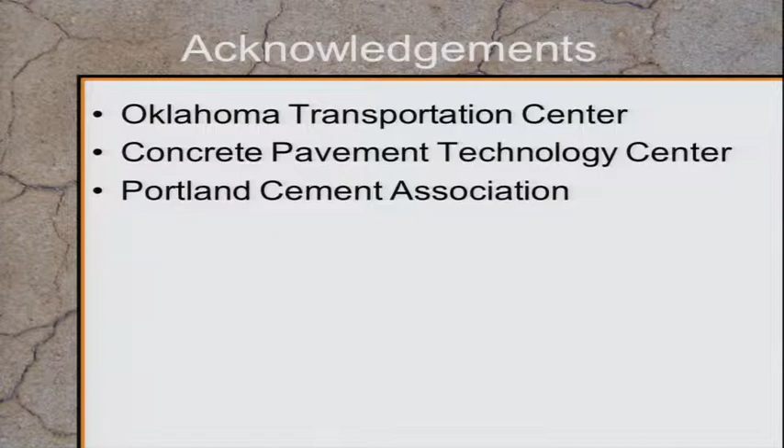And I have a whole team of graduate students listed up here that have all done some very, very great work on this project. Could not have done it without them. In addition to that team, I need to thank the folks that believed in me, that funded my early research project in this, because this is a little bit out of the ordinary. Oklahoma Transportation Center, Concrete Pavement Technology Center, and Portland Cement Association - this work started right here in Oklahoma, and we should be proud of that. Really, really proud of that.

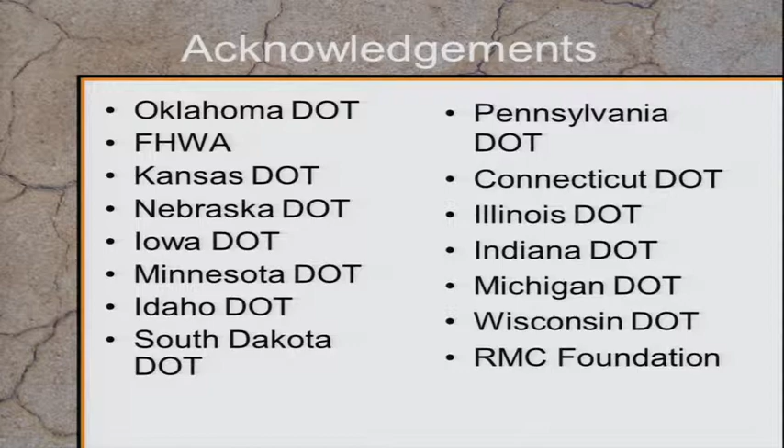Ongoing right now is actually the first Oklahoma-led pooled fund study, again, by research developed right here at Oklahoma State University. And ODOT should be very proud that these states have decided to join them and to fund this research. And I want to especially thank the folks here, and especially Ron Curb. Ron, this work could not have happened without you. I really appreciate it. But all these folks here on the whole research team made this possible. Okay, thanks a bunch for you guys.

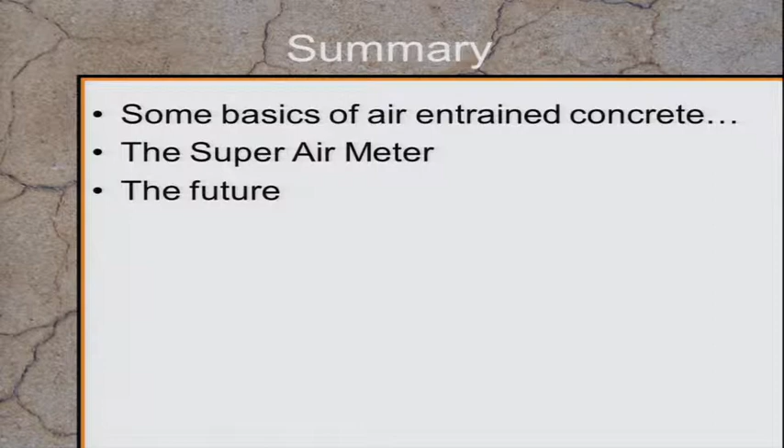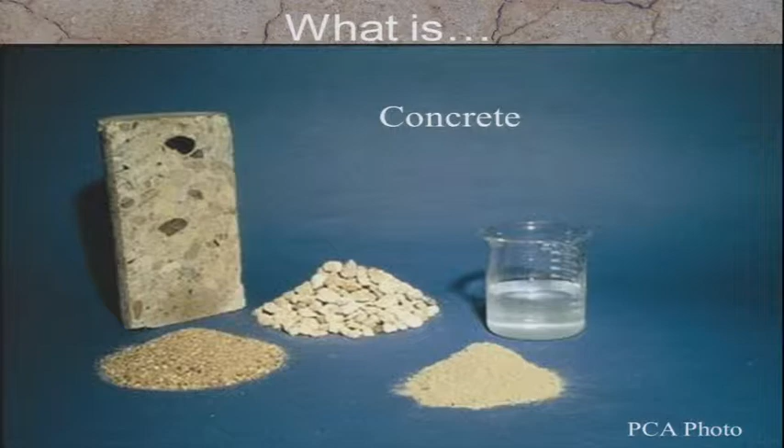Now I'm going to talk about some basics. I'm going to talk about the basics of air-entrained concrete. Something talked about, again, a new meter, something called the super air meter, and then the future, right? Now we're going to be talking about concrete. In my opinion, it's the greatest material on the face of the earth. And Jeff Volz and I will battle anyone in a battle royale that says differently, okay? We love concrete. We know that the ingredients in concrete are rock, sand, cement, and water.

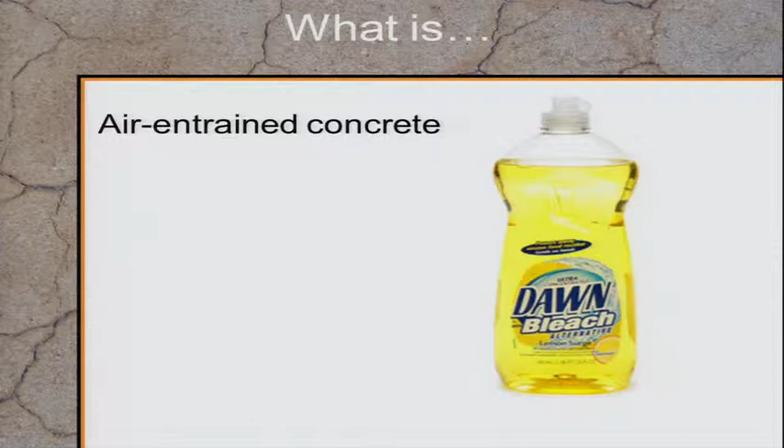And actually the last ingredient is love. You just got to whisper some sweet words to that concrete right as you're making it. That's the secret, okay? If it's not working, just whisper some sweet words to it. But you need one more ingredient if you want air-entrained concrete. One more ingredient: you need soap, okay? And I'm showing Dawn dish soap up here, and you can actually use Dawn dish soap to air-entrain your concrete. And you think, well, why would you do that? Well, your hands smell great, okay? But it doesn't really help your freeze-thaw durability, and that's what I'm going to be talking about today.

Why would we ever add air to concrete, right? Because when you add air, it's not very strong. All of my students know this. They've all heard that from me before. Air is not very strong, so why would you add something that's not very strong to your concrete? Well, these bubbles happen to be the key to the freeze-thaw resistance of the concrete. The key. And as we talked previously, weather's a big thing here in Oklahoma. Freezing and thawing is definitely a big thing, and we need these air-entrained bubbles.

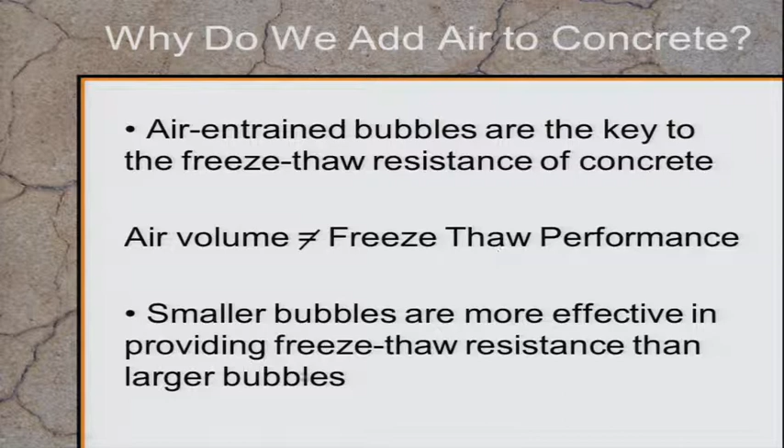This is really important, ladies and gentlemen. This is a new kind of concept. Air volume does not necessarily equal freeze-thaw performance. I'll say that again: air volume does not necessarily equal freeze-thaw performance, and I'll be proving that to you today. And the smaller bubbles in our concrete are much more effective in providing freeze-thaw resistance than our larger bubbles. So how much air do we need?

Most people know, most people that are in the field, most people that have dealt with concrete, they just know you need about 6% air. That's the old tried and true concept developed in the 1950s off 3 mix designs with 1 cement and 1 admixture.

It's not the same world we live in today, ladies and gentlemen. We live in a very, very complex world. We're going to talk about that coming up.

The current ways to measure air inside concrete are usually one of three methods: the pressure meter, the roll-a-meter, or the unit weight, and most commonly it's the pressure meter. We're going to be talking a lot about the pressure meter today, and actually an update to the pressure meter. But the biggest problem with all three of these methods is that they only measure volume, and volume is not enough.

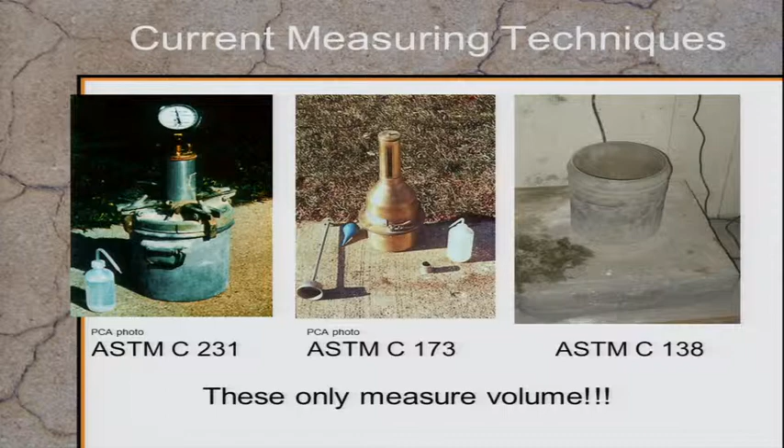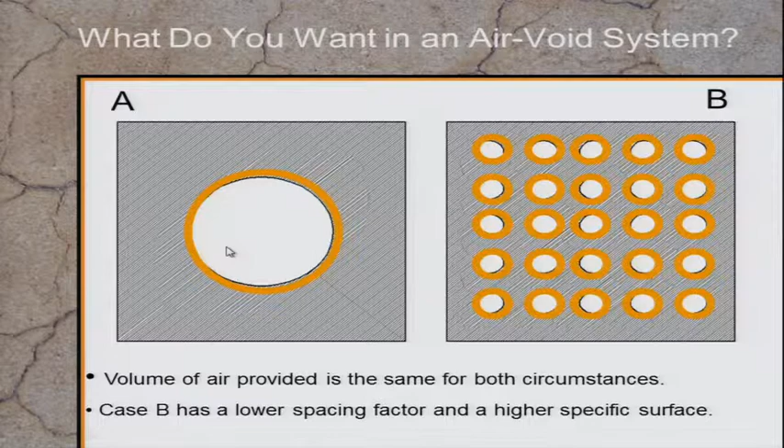That's why we want small, well-distributed bubbles inside of our concrete. Again, both of them have the same volume, but they don't have the same performance. Hope that makes sense.

Now, how would I find out what my spacing of my bubbles are? Well, right now, the only way to do that is to take hardened concrete, cut it up, polish it, and look at it underneath the microscope and actually run a linear traverse through it, and you count the bubbles. Oh my gosh, how boring is that, right? Yes. It kind of sounds exciting, but I'm kind of weird, I know. Takes a long time to do this, right?

But with this technique, you get something out called the spacing factor. Ooh, doesn't that sound impressive? What the spacing factor is, is a roundabout way to talk about the bubble spacing. Just real simply, it takes the real bubble distribution, or some concept of it, and makes an average size bubble averagely spaced in the paste, and then takes the average distance between them. So it's an average of an average of an average, right?

In the end, it tells us something about the bubble distribution inside of our concrete, and it works pretty well. And if we didn't understand anything I just said, that's okay. You should know that the spacing factor you want is 0.008 inches. That's the number you want. That's the magic number.

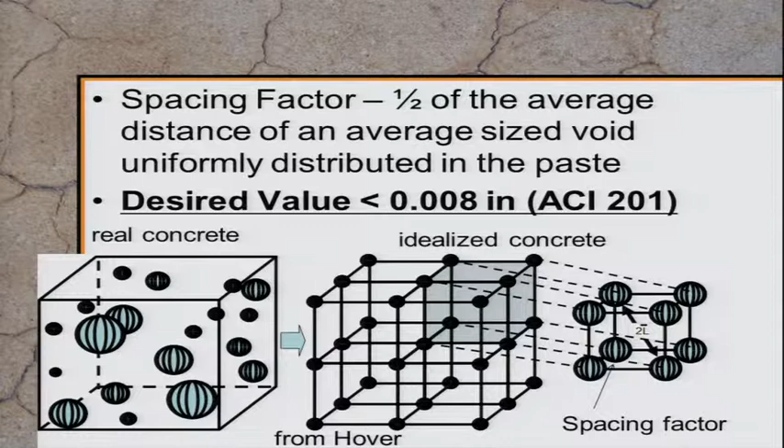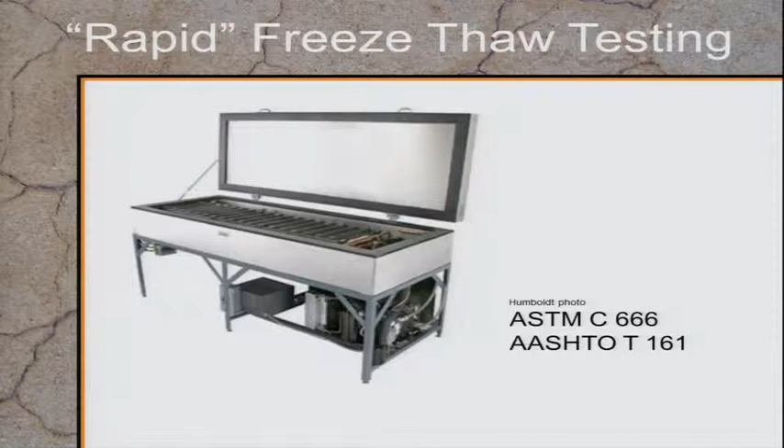Great. And the way to really test this is with something called the rapid freeze thaw testing. Notice I have the term rapid in quotes because it's very rapid in terms of geologic time, but not rapid in terms of human time. It takes about 3.5 months to run this test, and we cannot wait to decide if that's good concrete until 3.5 months after it's been placed. That's just not acceptable. But that's the tried and true method.

Now, if we can summarize all this: we've got these pressure meter tests that don't take very long, they take minutes, and they give you total air volume. We've got this hardened air void analysis test, this microscope test - it takes 7 to 14 days because you have to cut the concrete and polish it, but it tells you something truly about the air void system. We have this rapid freeze thaw test, which takes 3 months. This is maybe the best of all of them, but we can't wait 3 months.

So what does everyone use? The test that takes minutes. We have to make decisions now, right? Got to make decisions now about our concrete. We have to decide immediately - is it good or is it not? What's going on? Now, let me just show you this in another way.

Maybe there might be a few skeptics out there when I say that our modern concrete mixtures are a little bit different than our old ones. And this is a very old school mixture. This concrete mixture only has one admixture in it, an air entraining admixture.

That's it. And we can notice we got this magic spacing factor. That's the magic number, I'm showing you 008. That's the number you want. And when you get enough air inside your concrete, you're good. 6% worked well, that meets specifications. Everyone's happy, everything's good, the world's a good place.

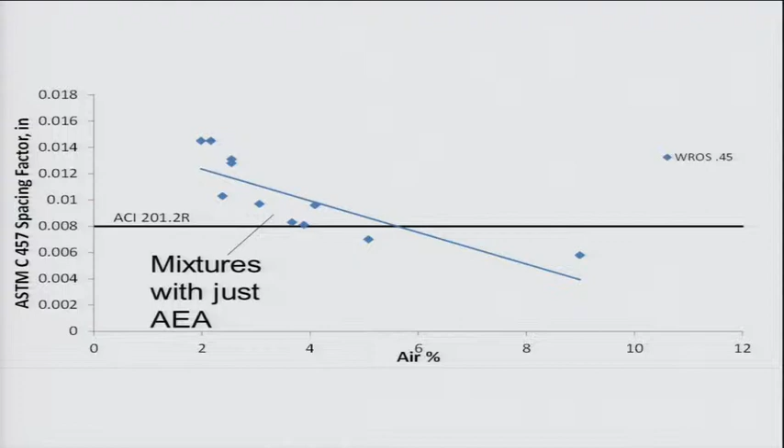Now let's bring in the bad news. If we bring in a mixture with a high-range water reducer in it, how often are those used these days? A lot. Well, when you start to combine admixtures inside your concrete, you'll find out that 6% air doesn't work well anymore. 6% air doesn't provide us the spacing of the bubbles that we need for freeze-thaw performance, and I'll prove that to you coming up.

And you need something like 9% air sometimes. In some mixes it's 7, in some mixes it's 10. Air volume by itself is not enough, and I call this the yikes graph, because for specification writers this is the scary one. You have no idea what concrete mixture they're going to use when they go to build your job. You can just tell them how much volume of air right now, and we need to do better than that, and we will. Let me show you a bit more data.

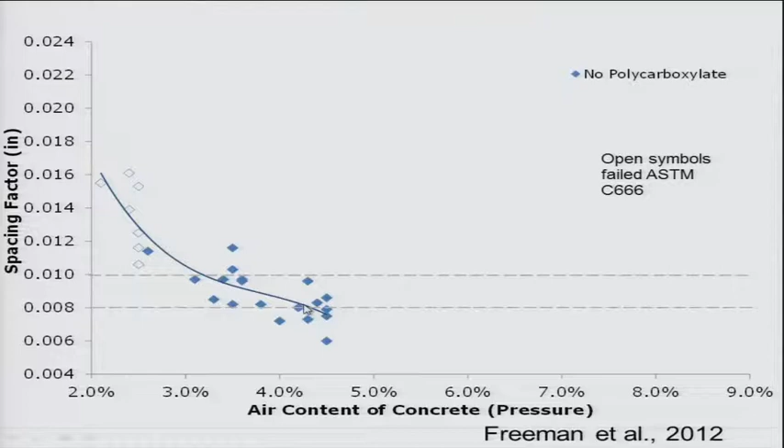If I show air content down here on the x-axis, I show this spacing factor number, and this is this magic number, 008. And now I'm showing you data: if it's an open dot, that means it failed the freeze-thaw test, and if it's a closed dot, that means it passed. This is mixtures with just air entrainers, the old school, the easy ones. And if you start to bring in mixtures with high-range water reducers in them, they start to look like this. These two data points right here should make every highway official, every owner of concrete infrastructure take notice.

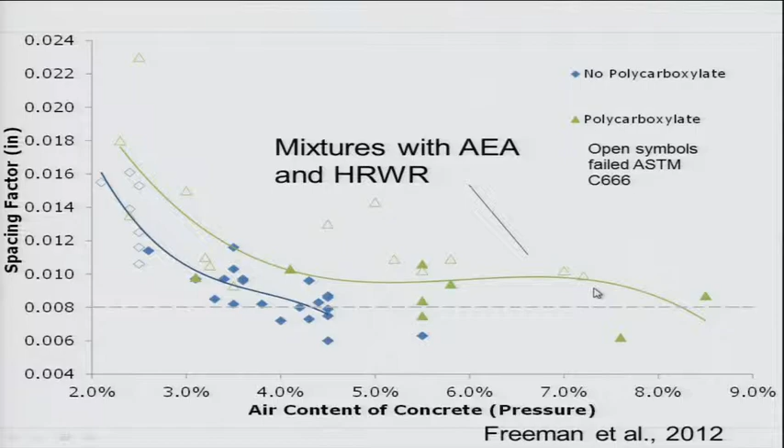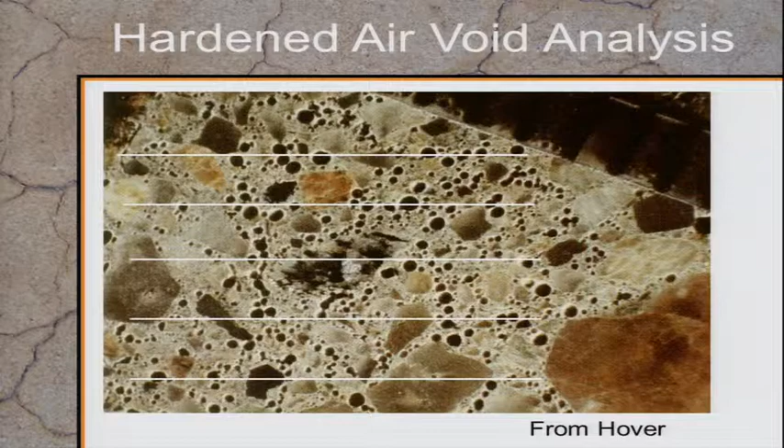Because these mixtures would pass every specification in America, yet they're failing the freeze-thaw test. So why does this happen? What's going on here? Why does this occur? Well, remember that hardened air void analysis? We can actually go through it. Instead of just using one number, we can look at the distribution of the bubbles. This is the bubble size down here, and this is the frequency, or how often they occur.

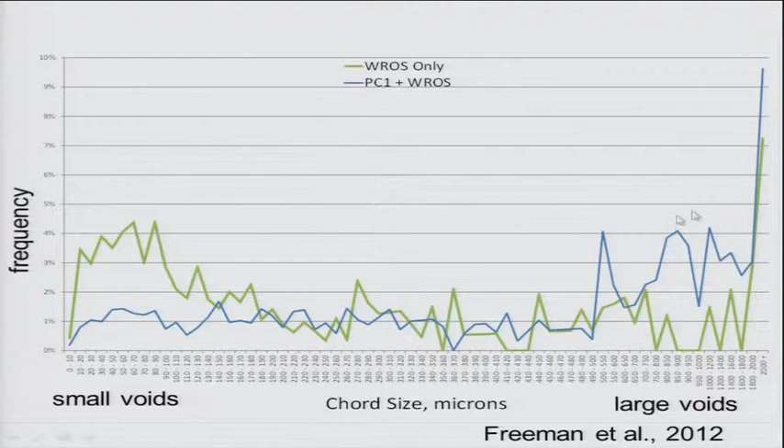They're small voids, and this is the mixture with just an air entrainer, old school. Look at that, we get a bunch of small voids. That's good. And look at the new mixture, the ones with the combination of admixtures. We get a bunch of big voids. That's bad. It's that simple, ladies and gentlemen. Good and bad, okay? That's what we want. Air volume is no longer enough.

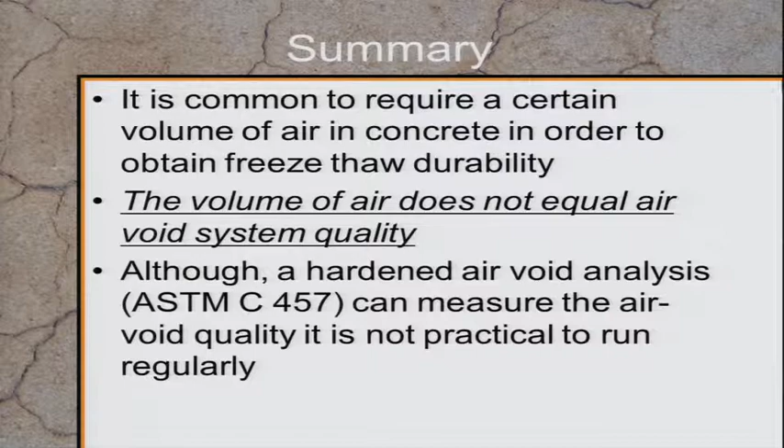So in summary, it's common to require a certain volume of air in concrete in order to obtain freeze-thaw durability. But this volume of air does not equal air void system quality, it does not equal freeze-thaw performance. And although we can run hardened air void analysis, it's just not practical to run that all the time. So what do we need? We need a test that can quantify air void systems quickly in fresh concrete, a test that can investigate a sample of significant size that's economical and field ready.

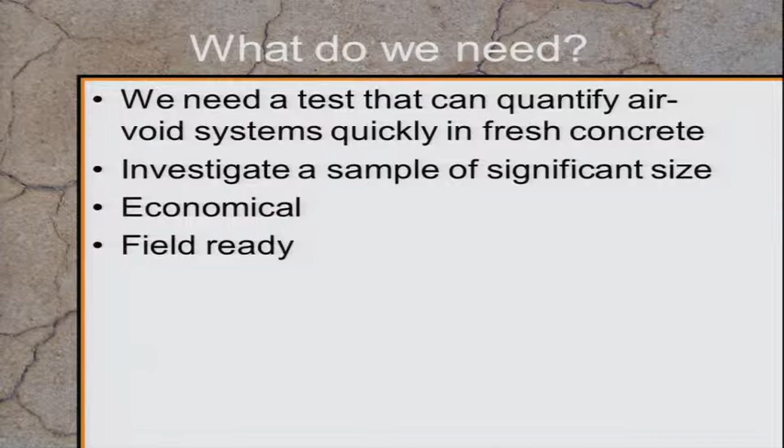Ladies and gentlemen, I want to introduce and talk to you about the super air meter. What it is, is a typical air meter, but we've modified it so it can hold higher pressures. We've actually replaced the typical dial gauge with an actual digital one, and the test is going to end up taking 8 minutes to run, which is a little bit longer than the actual typical one, but that's okay. I'll talk more about that coming up. And this is what it looks like, and I'm actually lucky to have one right here in front of you today, so you can come and look at it if you want later on.

And if we notice, the label is orange - oh, strikingly orange. What a beautiful color. That's on purpose. And no, it doesn't come in Sooner Red.

The digital gauge on top is really cool. This gauge is amazing, something we developed at Oklahoma State, working with other folks. It will tell the operator how to run the test, watches the operator run it, and will void it if they run it incorrectly. It gives you all the calculations and two numbers: the air content, same number we're used to getting, and something called the SAM number, which I'm going to talk about. This digital gauge is really, really important.

Everything here you can learn more about on this website, superairmeter.com. So how does it work?

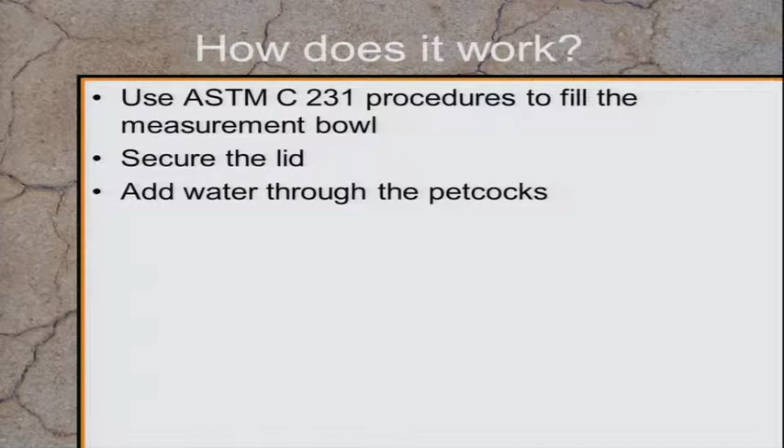Well, you fill the bottom bowl in the same way you always would, no difference. Three layers, 25 rods each, tap it with the hammer, put the lid on it, add the water through the petcocks, same way we always run an air meter test. We're going to talk about what goes on in the top chamber and the bottom chamber. Top chamber's up here, bottom chamber's where your concrete goes, and this is where the actual water is.

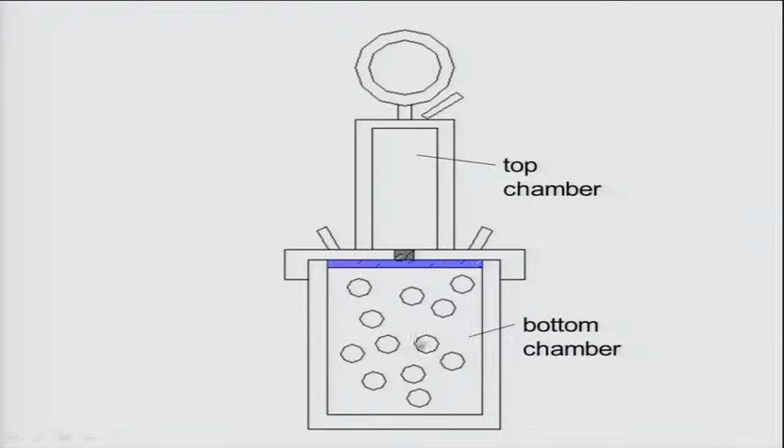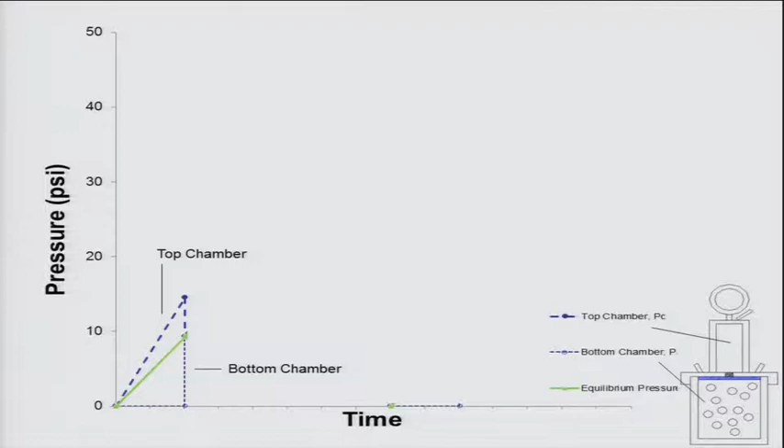This is just an idea of how the test runs. This is pressure, and this is time. Top chamber, you increase the pressure, the bottom chamber's at atmospheric. You hit the lever, smack it with the hammer, and that's the typical way to run a pressure meter test. This is the standard way, okay? For you concrete people out there, you know what I'm talking about. If you don't, good luck to you.

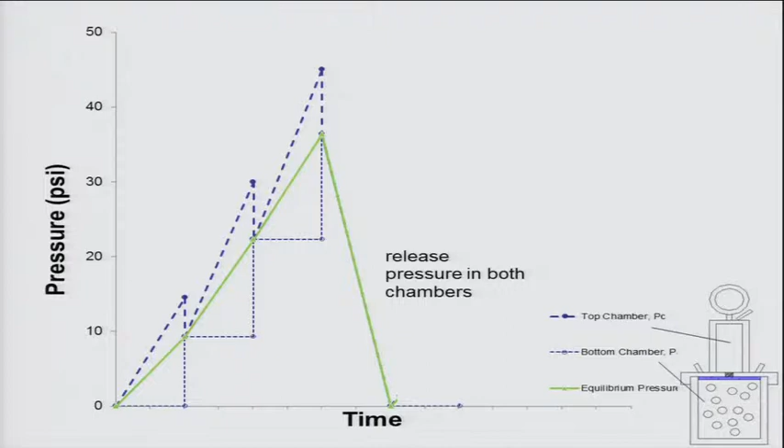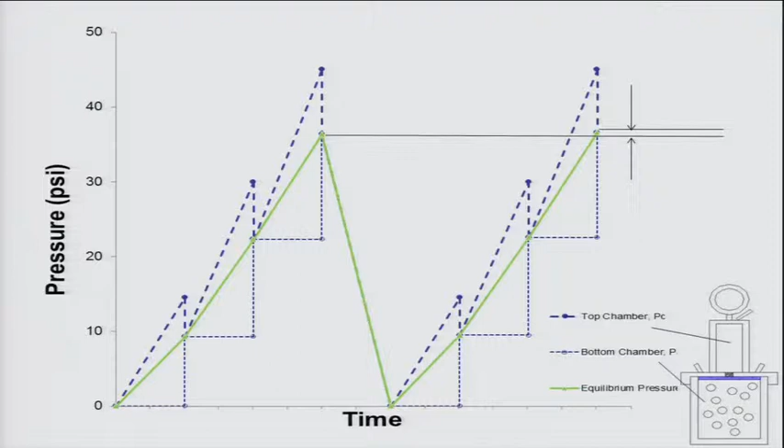We run the test again without releasing the petcocks, and then again, and we get a curve. Then we release the petcocks, take it back down to atmospheric pressure, and run the test again, and we get two curves, which we compare - the first curve to the second curve. Most folks in this room, it probably looks pretty similar, but if you look very carefully, there's distinct differences, and those differences between the curves give great insight into the air void system inside your concrete. I'll talk more about that coming up.

We're going to use an algorithm to calculate something called a SAM number, the super air meter number. The SAM number correlates to air void size distribution - I'll prove that to you coming up. The meter's also going to measure the typical air volume.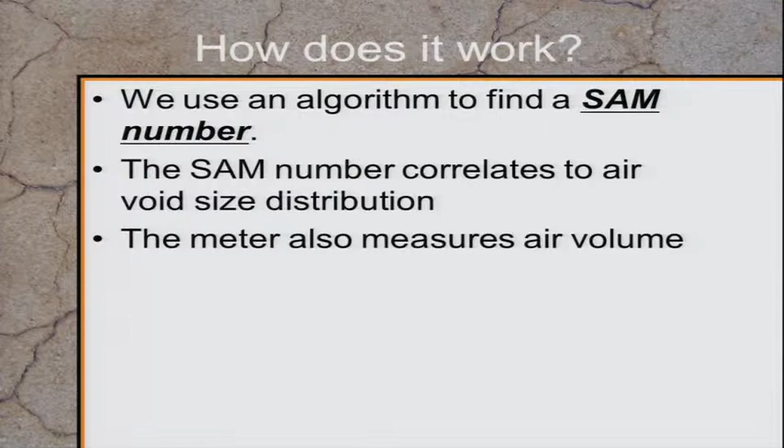We looked at 95 different concrete mixtures, all kinds of different commercial air entraining agents, combinations of admixtures, different water to cement ratios, different slumps, different air contents in every one of them. We did that hardened air void analysis, the one that takes a long time, and we're going to compare the SAM number to the hardened air void analysis numbers. Okay, does that make sense?

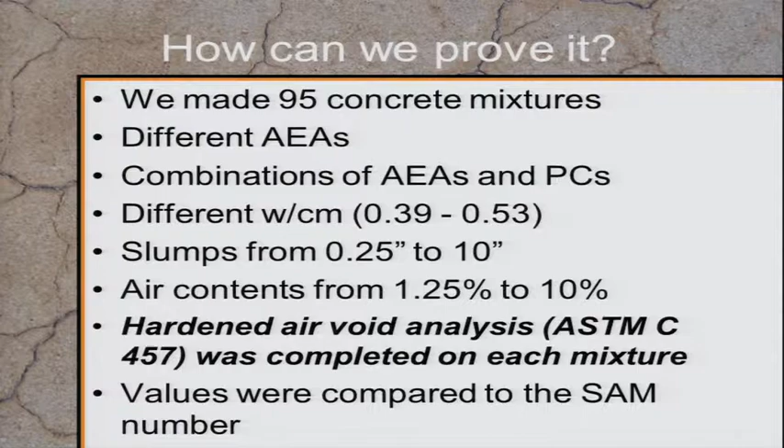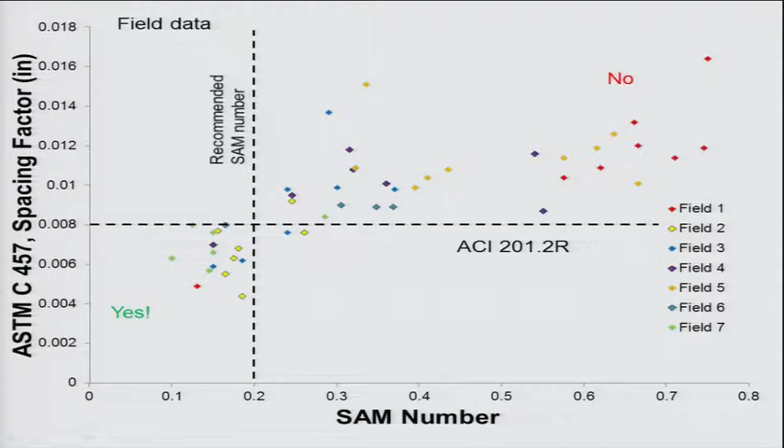That's lab data - how about field data? Well, here we go, we got some. 60 different field mixtures where we've done the exact same testing and we get the exact same trends. Again, great agreement here - this is the yes, this is the no. The SAM number does a much better job than the air content at giving you an indication of the spacing factor.

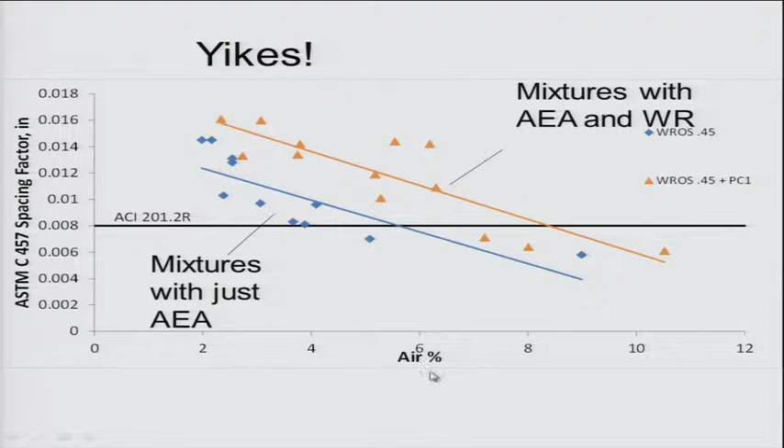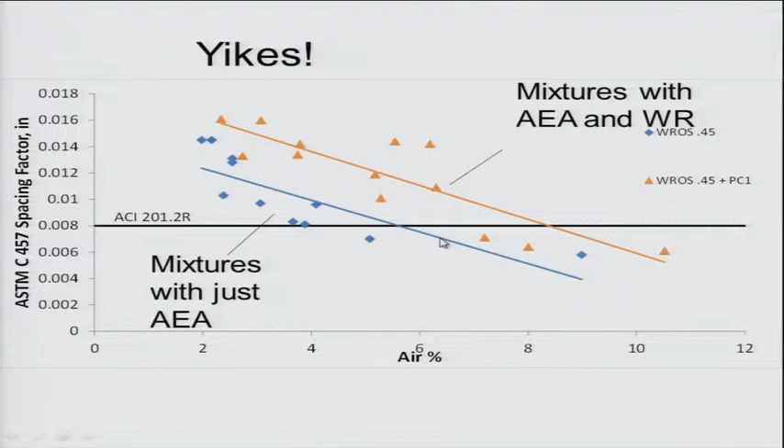This is exciting, this is really exciting. We can look at freeze-thaw testing as well.

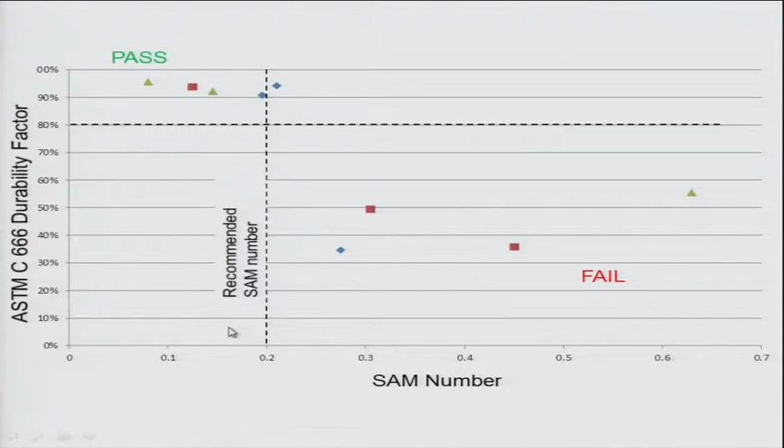666 testing, this is the one that takes 3.5 months to run. And again, the SAM number does a good job, at least with this limited data set, to determine between the ones that pass and the ones that fail. When SAM number is less than 0.2, pass the freeze-thaw test; greater than 0.2, fail the freeze-thaw test.

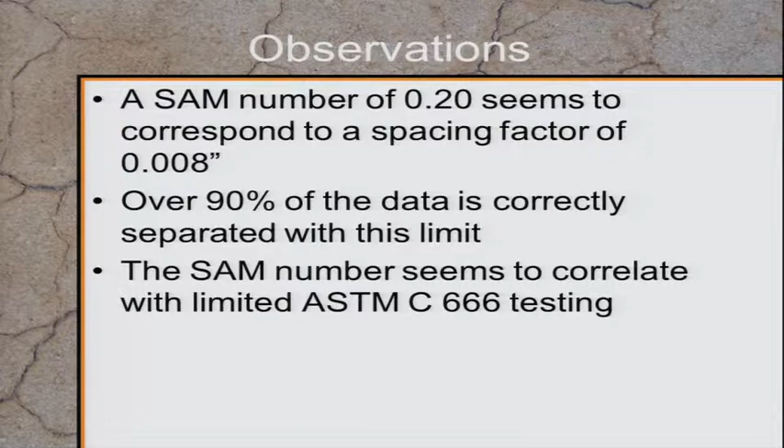So what are some observations? SAM number of 0.2 seems to correspond to a spacing factor of 0.008. Over 90% of the data is correctly separated with this limit, and the SAM number seems to correlate with the limited freeze-thaw testing. This is really cool.

So how consistent is it? Well, over those 95 mixtures, we actually used 2 different meters, with 2 different operators, and ran them head-to-head. We're going to talk about air content and super air meter number.

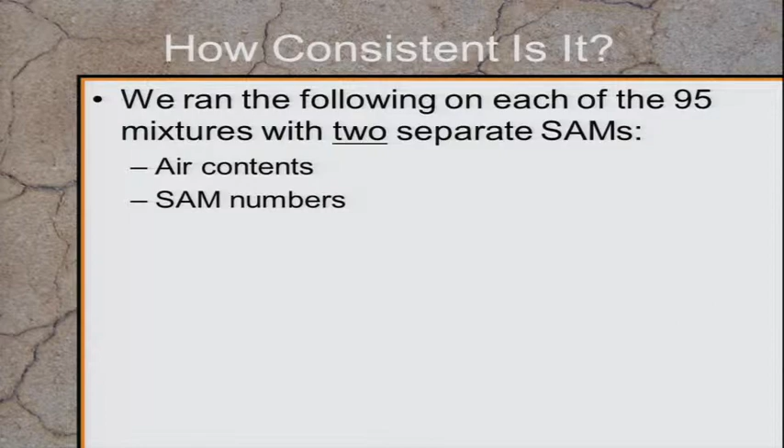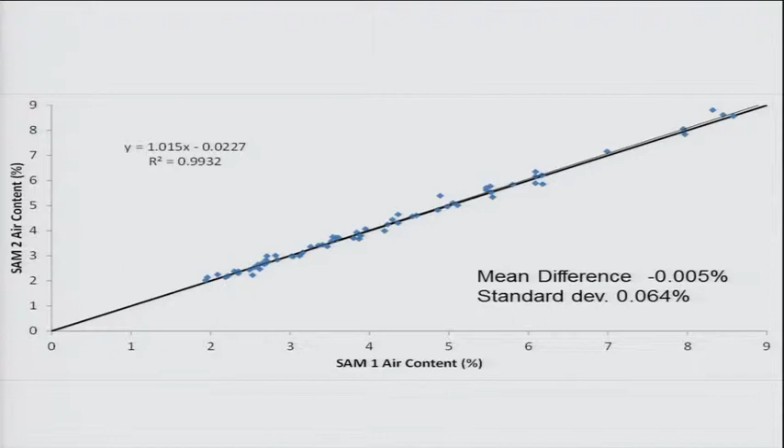If you look at air content numbers, the average difference is 0. 2 meters, side by side, 0. That's great, that's really good. And the standard deviation is extremely low.

And again, if you compare the SAM number from 1 meter to the SAM number from another, the mean difference again is 0. And the standard deviation is pretty low. It's not perfect, but it's pretty low.

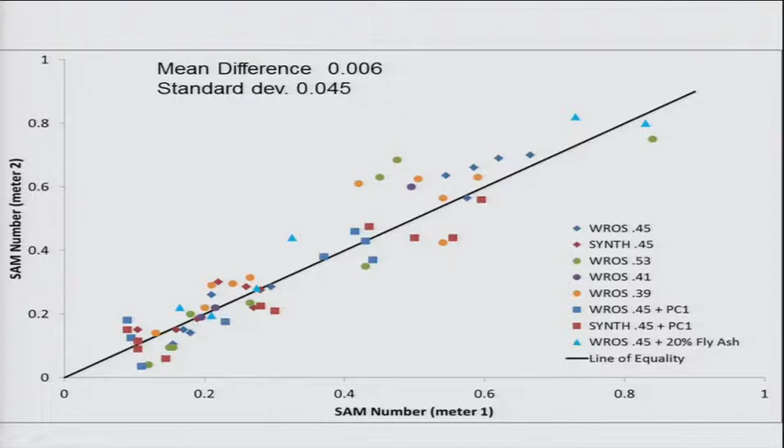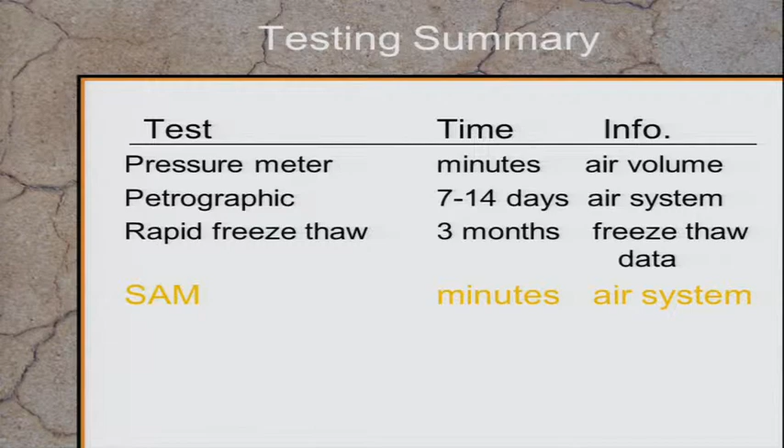So we need to add a new entry to this table. We need to add the SAM number. And in minutes, we're able to get the same information that used to take us 7 to 14 days. This is exciting. We can make decisions before the concrete's placed. We can save ourselves from a road that needs to be prematurely replaced.

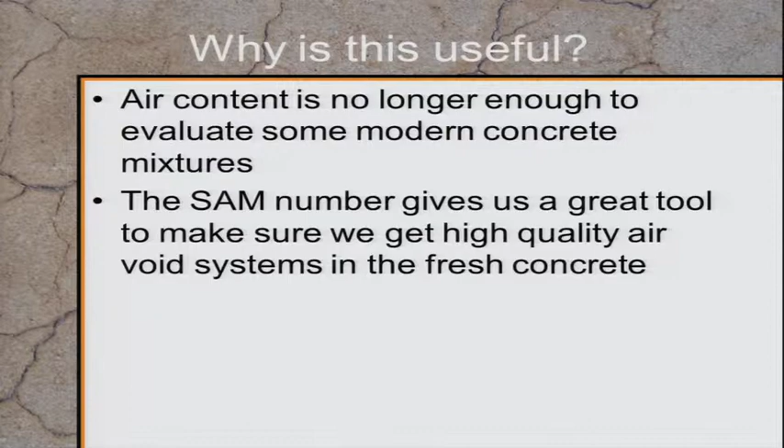This is really exciting. So why is this useful? Air content is no longer enough to evaluate some modern concrete mixtures. The SAM number gives us a tool to make sure we get high-quality air void systems in the fresh concrete.

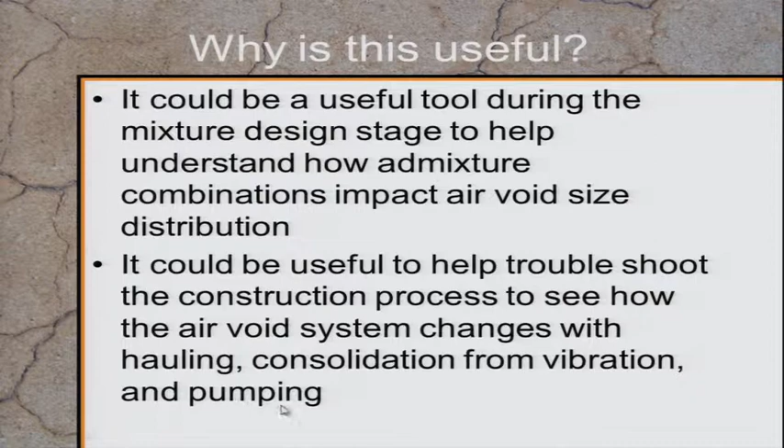It could be a useful tool also during the mixture design stage to help us understand how different admixture combinations come together. And it could be a useful tool in the field to actually troubleshoot the actual construction process. How do things change during hauling, during vibration, during pumping? Super Air Meter can help us with that.

So what's happening? How does this work? The last couple minutes, I'm going to talk about that.

Well, the best way to show it is we took some bottles that were about 3 inches by about 2 inches by about an inch, and we're going to fill them full of air-entrained cement paste. No rocks, no sand, just air-entrained cement paste. And we're going to fill the rest of it up with water, and put a straw on it, and very, very carefully turn the bottle on its side.

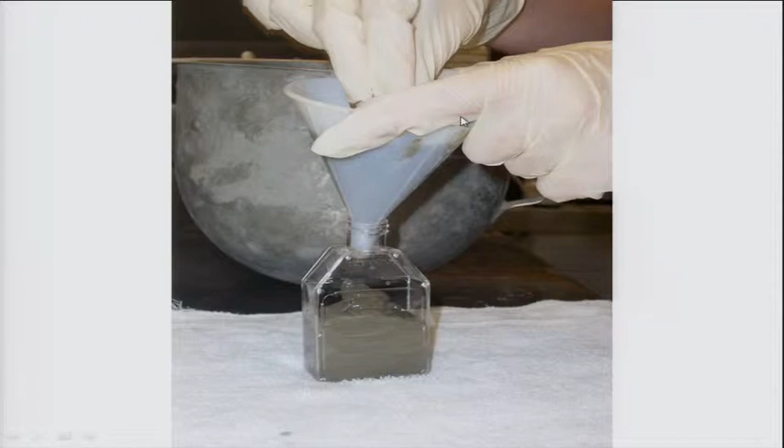So we turn it on its side, and over time, bubbles are going to escape up and get caught on this surface. We're going to look at these bubbles with the stereo microscope. These bubbles are not inside the cement paste, these bubbles are floating in water. They've escaped. And we can use an air pump to simulate the pressures that would usually happen inside one of these pressure meters, and we can see what happens to the bubbles.

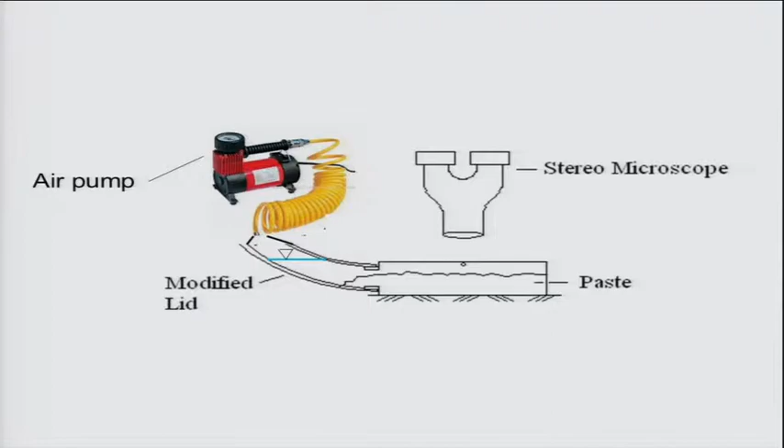It took us a long time to get there, but it's been fun. As you increase the pressure, you drive the small bubbles into solution.

When you pressurize the bubbles the second time, there are fewer small bubbles, and so the concrete responds differently to the same pressures. So what else have we done?

We've looked at hot weather, cold weather concrete. We've looked at all kinds of different aggregates. We've done a lot of field testing. We've gathered lab data from a lot of different folks. And this is really exciting.

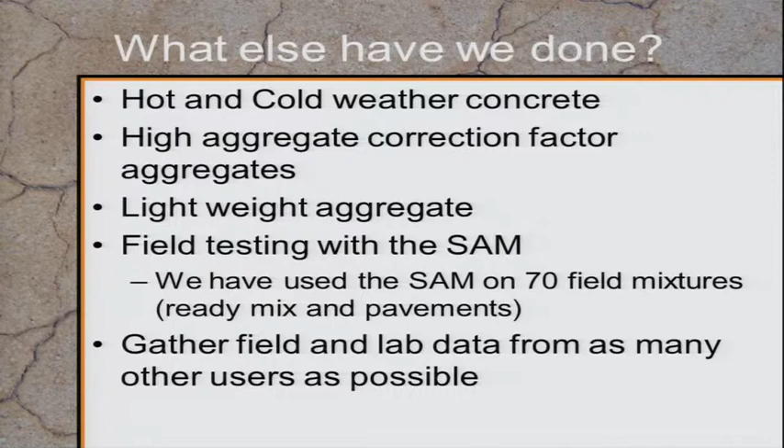In February, we're going to have an AASHTO provisional test method on the super air meter. That is super exciting. That's really, really exciting. So that means we can specify it, right?

It's going to exist. The following states have a super air meter. Over 17 states do, and I've got 2 highlighted there. 2 states have already started to specify the super air meter on jobs, in Michigan and right here in Oklahoma. Oklahoma Turnpike Authority is starting to use it, and Bruce Arnold's starting to use it in Tulsa as well, right?

That's right. Why don't we have more orange up there? We should. We should get more states, more jobs, more people. And anytime I have a number next to it, that's the number of super air meters in a state, the number of groups using a super air meter in the state. So we see a lot of folks are getting behind this, a lot of folks are getting excited about this. Again, it started right here in Oklahoma with research.

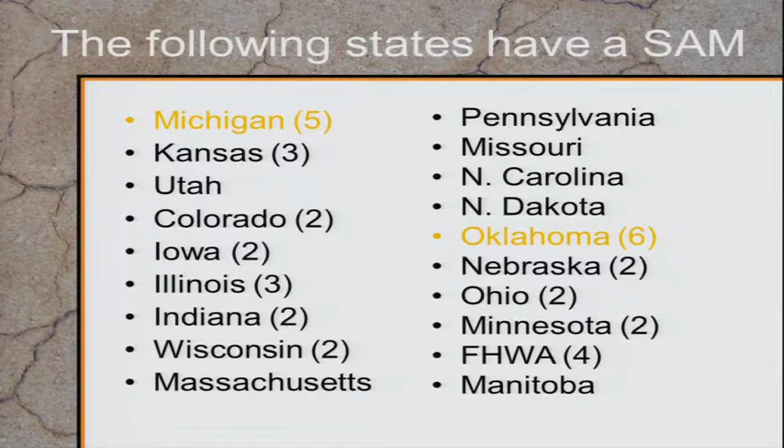So how can this group help? Well, you can tell someone else about the super air meter. That would be great. You can try the super air meter for yourself. We need to get the super air meters used. If you have influence on whether they're used or not, let's try it. Let's just see what happens, okay? I think it'll make your concrete better.

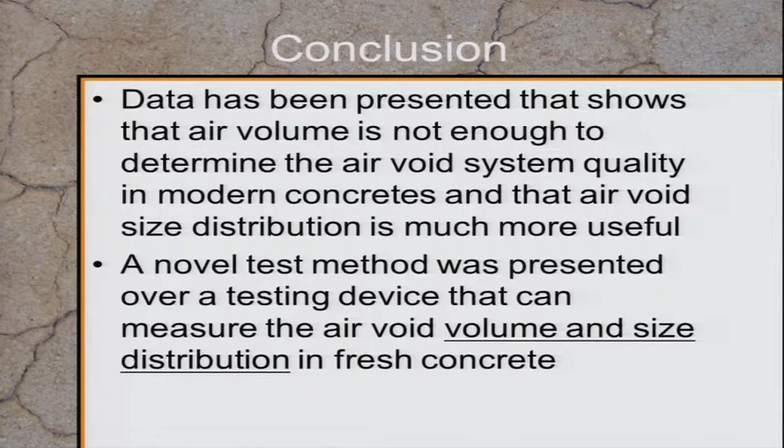In conclusion, data has been presented that shows that air volume is not enough to determine air void system quality in modern concretes, and that air void size distribution is much more useful. We've shown a novel test method that can tell us both the volume and the size distribution in fresh concrete. A SAM number of 0.2 seems to correspond with a spacing factor of 0.008, and over 90% of the lab and field data is correctly separated by this limit. The SAM number seems to correlate well with the limited freeze-thaw testing.